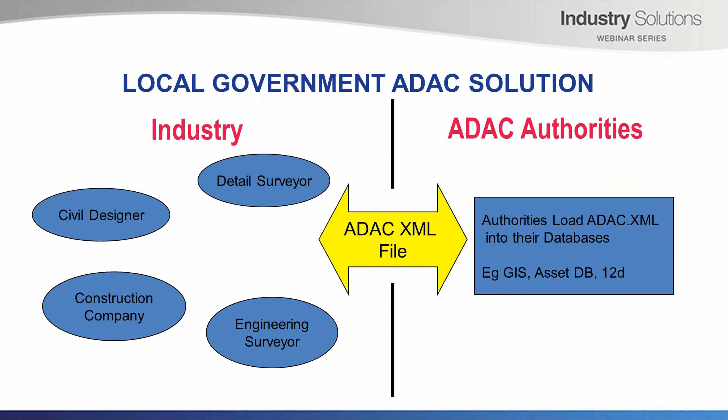So the idea with the ADAC and the ADAC XML is that the authorities can ask for the file from industry and it'll be the same from everybody. Then they can take that file, which they know all about, and can load it into their different databases, because there's a variety of things. It might be GIS, it might be an asset database, it could be into 12D Model. It's just not going to one place. But more than that, this is really what the diagram is.

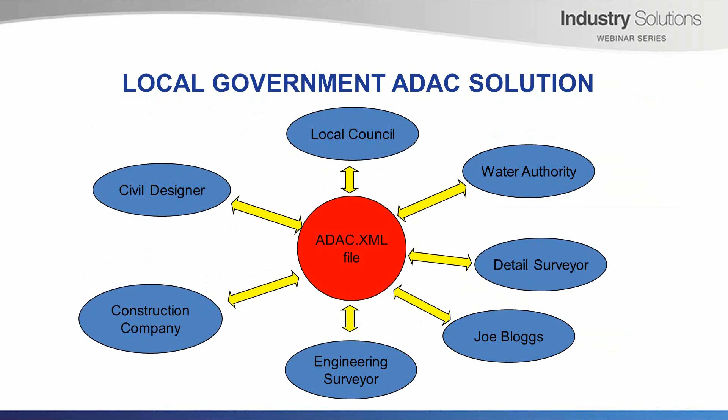You have your ADAC XML file in the middle. The people can read and write that. So all these different groups who can read and write ADAC XML can then transfer data between each other. So it's quite open to everybody. It could even be for Joe Bloggs, who's just some individual somewhere. He has no problem reading and writing that data once he looks at the format.

Initially, there were about 68 ADAC assets, and from the literature that shows things like water, transport, sewerage, stormwater, and so on. And there's also work underway for things like bridges, buildings, coastal infrastructure, and pump stations. That ADAC consortium then just meets regularly to start adding more things to it.

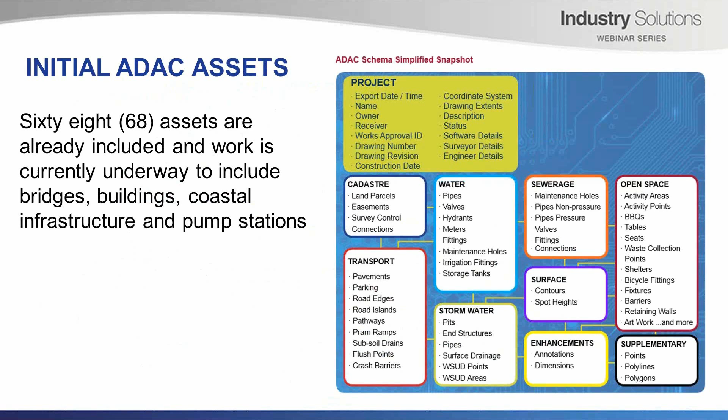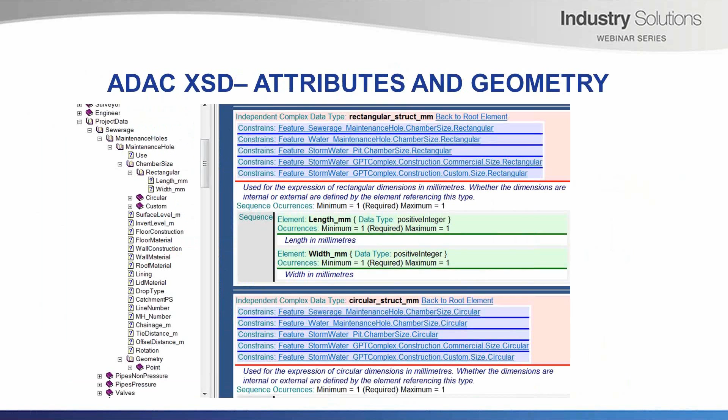Now, what they actually do is they publish the ADAC XML schema, and that's in the form of a CHM help file, and this defines everything in the ADAC XML file. So basically, I've expanded there on the left-hand side. It's showing you've got header information, which you call the project header: the name, the owner, the receiver, things like that, coordinate system, the surveyor and the engineer. Then you have project data, and that's where you have individual assets, say for sewerage, transport, water supply, and so on. When we actually get to the assets, they do have attributes and geometry.

So, for example, here are the various attributes that go with a maintenance hole. So you've got chamber size. It could be rectangular, circular, or custom. If it's rectangular, it has a length_mm and a width_mm. And they're actually positive integers, and you have to have one of them, just one. So that's how far the definition goes.

It goes down not only to give this hierarchy of where everything should be sitting, but will say that this value has to be something like a positive integer, or it has to be a bit of text. The good thing about that is that you can use that XSD to check a file against, so you can validate it before it goes anywhere to make sure it satisfies all these conditions.

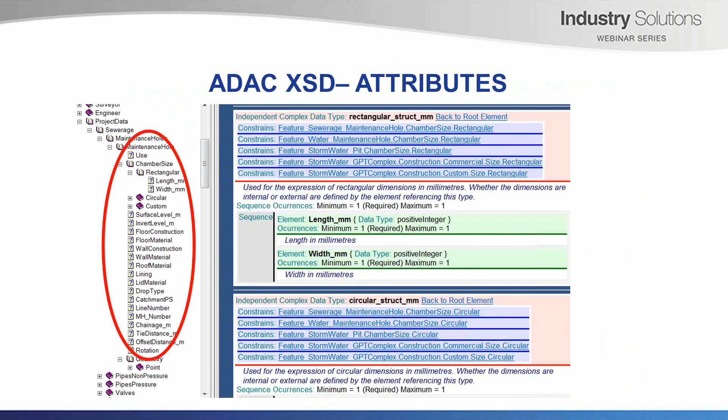So they're the attributes, but you also have geometry. And the ADAC geometry can either be a point, a polyline, or a polygon. They may or may not have arcs in them. The asset will say if you're allowed to have arcs in your polyline or polygon, but it's one of those, and the asset says which one it is.

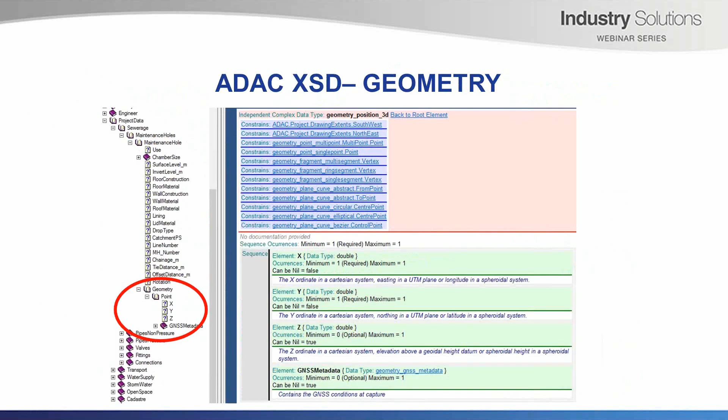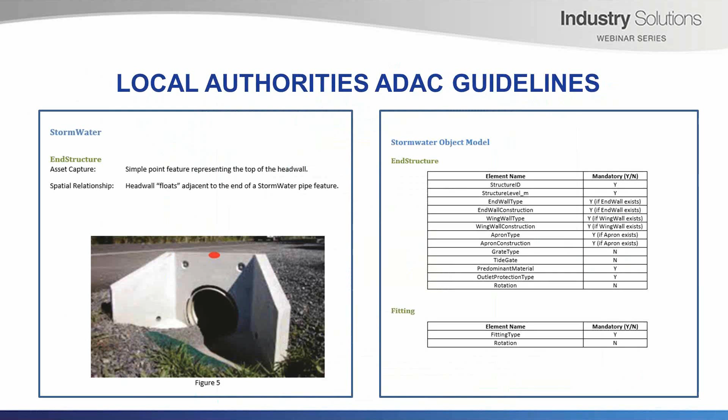Now, the local authorities also have these guidelines, and again, this is one for Bundaberg, Gladstone, and Rockhampton, who took the general ones and then just localized them. And for example, for stormwater, the end structure, it was one point in the ADAC, and it shows you here exactly what they want, the top of it, the head wall, and on the right-hand side is more specific for those councils. These are the attributes, and they've got there whether they want them or not, whether they're mandatory. So StructureLevel_m is mandatory, but something else like tide gate, they don't wish it. So that's where it may be restricted for each council.

Now, 12d and ADAC. As you see, ADAC is coming from a government group of people, and so the other thing for us at 12d is how do we implement and get involved with ADAC? Well, our approach is that we want to have ADAC data fidelity. That is, if we read in data from ADAC, we can hold all the information there, so there's no data loss. And luckily in 12d Model, we have all those types of geometry, point, polyline, and polygon, and we also have hierarchical attributes, so we can hold that full attribute schema with no problems.

The other thing we've done is that the ADAC editors and validators within 12d Model are driven by that ADAC XSD. That minimizes any implementation errors, and if there's a new schema, we can update to it very quickly. All the data in 12d Model is 3D as required by ADAC, so there's no problems there. And in particular, we will be able to round trip the data. Because we can hold it all, we could read in a file and write it out again, and there'd be no loss of information.

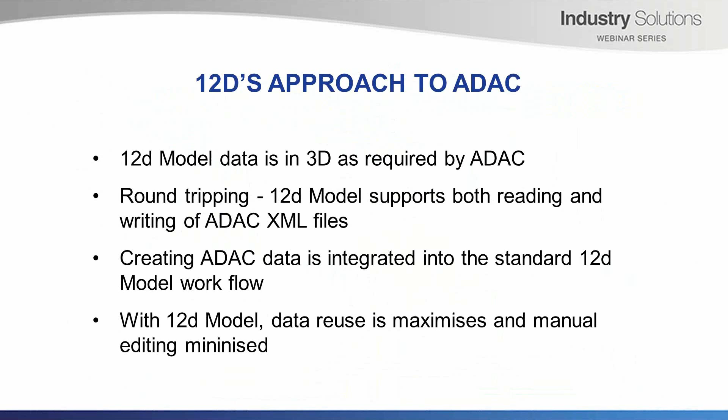We also want to integrate the ADAC data into the standard 12D model workflow, so our users don't have to learn a totally new set of things to do. And inside 12D model, we want to maximize the reuse of data. We don't want you to have to type in things twice. So by doing that, we minimize manual editing.

So what I'm going to do now is actually demonstrate for you using ADAC inside 12D model. What I'll do first is read in a file, to see how anyone can read one in with 12D model, and then we'll look at how a designer and a surveyor produce an ADAC XML file and explain the differences between those two types of people.

Right, so I'll just open up a blank 12D model, and I'll read in an ADAC XML. With ADAC inside 12D model, it's under our menu. There's actually an option for ADAC, which is the menu I've got here, or by just using the F12 button, it will bring up the menu. The other possibility is toolbars, and down the side here I've got a number of those ADAC options on the toolbars. So there's a variety of ways of getting access to it.

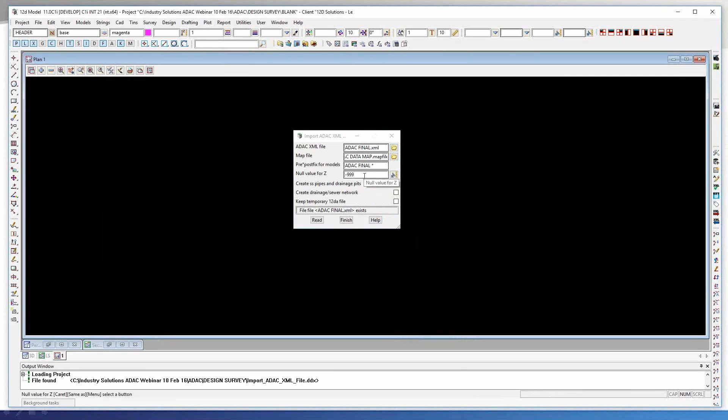So in this case I'm going to read in an ADAC XML file, and I've just picked it from the ones that are available here. I'm going to use a map file, and those people who've used 12D model, and most of you have, know that when we read in the data, we're able to map it into different models, different colors, and so on. We're also going to set any -999s to null Z values in 12D. We're going to create pipes and drainage pits from that data.

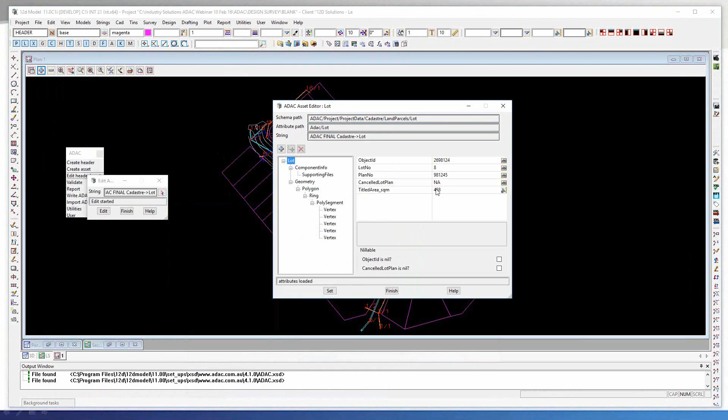So we've just read that in, and we'll just add that information. We split it into these different models as we read it in. We'll just add those on. So that's some ADAC data coming in. And if we now look at that with the ADAC editor, I'll just get up the menu and edit one of these assets. And when we accept it, you can see this is the ADAC editor, and these are the various things you could have in it, its geometry and the information for those assets. So it's all come in from that particular file.

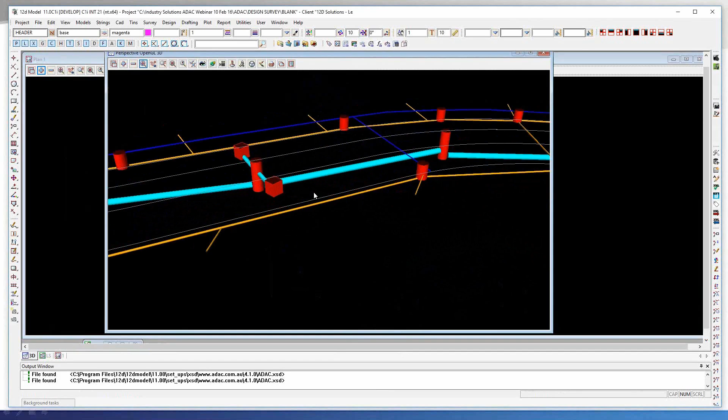I will go and show how we created this file, but this file could have come from anybody. So the information's all there, and we can use it for a variety of things. For example, we could use it to label. We could look at it in 3D. So I'll just add the same data onto a 3D view. If there was a null Z value, then it won't show up on the 3D view, of course. You can see you've got your round pits, rectangular pits, pipes, and so on. So it is all proper 3D data. So that's an ADAC file.

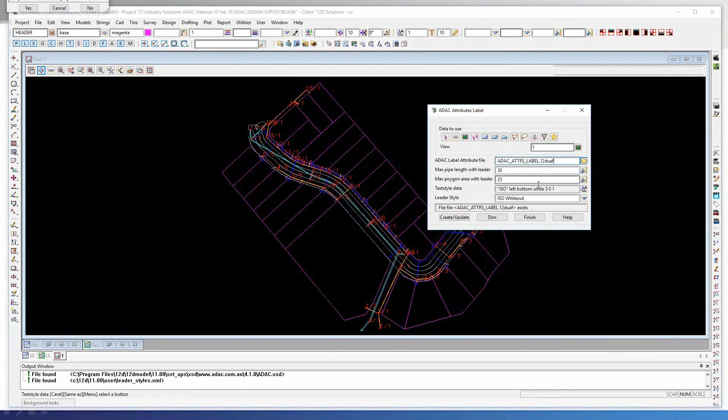Another thing that you could potentially do would be to label it. I'm just going to run a macro here first to get the data ready. This is just tagging it so we can use it for updating. And so if we want to label this data, we'll just label all the data in the view. This is an option where we use a file to say what do we want to do? Do we want leaders and so on? How do we actually want to label it? And I'll just run this, and it's created a whole lot of label models which weren't there before.

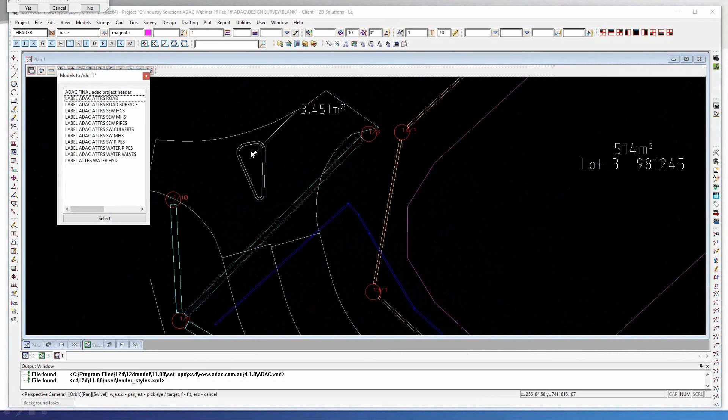So what I might do is turn on, say, lots. So we saw that lot information, and here we've been able to label it. Similarly, I might turn on road islands, and in this case, we've actually labeled it with a leader because it wouldn't fit inside.

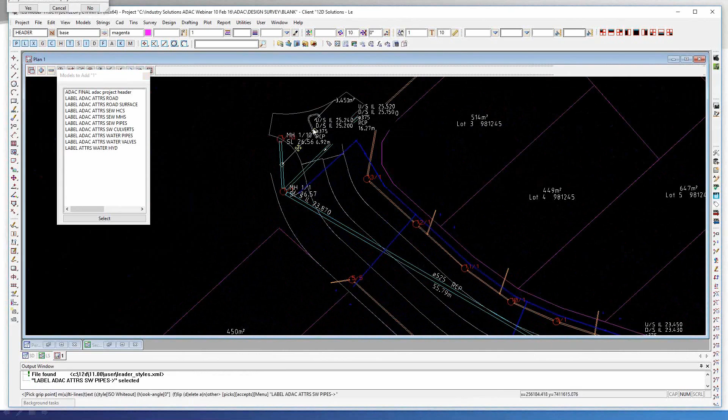So the data is all there, and you can use it to do all sorts of things. So you could turn on your stormwater manholes and pipes and so on. These are 12D model leaders, so they are intelligent leaders. So if you don't exactly like where they are, you can actually pick on them and move them around out of the way and so on. So the information's all there to use.

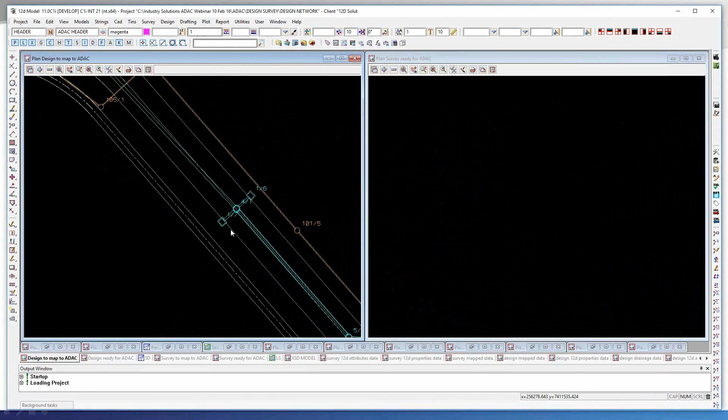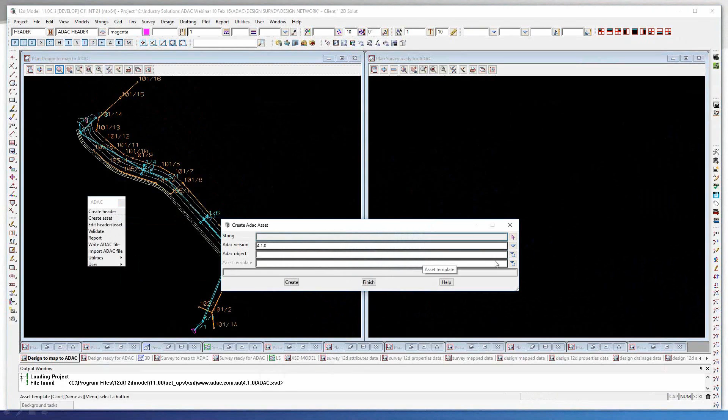So inside 12D model, they are actual pits and pipes and things. And being 12D data, in this case, this whole string here is a whole drainage network. So we know a lot of information about it. The designer has all that information, so we can use that to go straight across to the ADAC file. We could pick up particular things and create an ADAC asset, and that just allows us to pick one for a version. Depending on the point or polyline, we can actually manually do it.

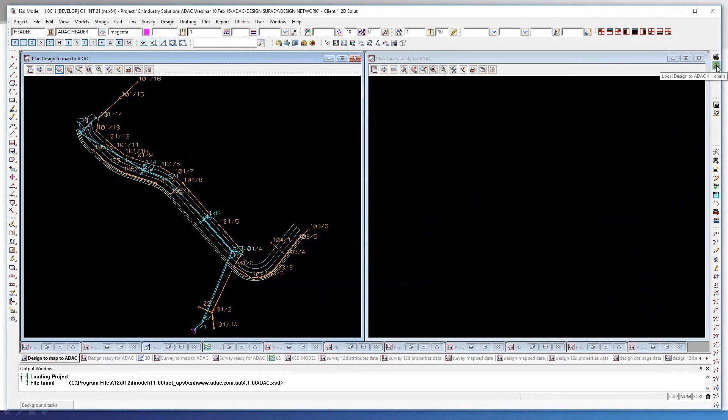But what we do inside 12D model, we run what we call a chain and use a mapping file. And if you know what these things are going to be, you can say map all the manholes to ADAC manholes, pipes to pipes, and so on. So you don't have to do things manually. So I'm going to actually run this chain just to show you how it works, and we'll look at it a little bit more carefully later on. So we'll do the local design to ADAC chain.

So it's processing the data. It's completing the chain. And you can see there, I've got the wrong view up there to look at the data in. It's actually now posted and put it up there. Now, if we now look at this data here, say with our ADAC editor, like we did before, we're going to look at any ADAC data.

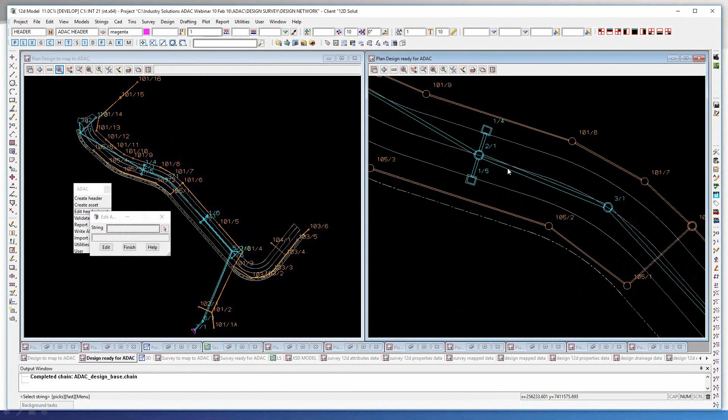So if we actually pick on the pipe here, it comes up as a pressure pipe, and has all the information we picked up from there, the size of it, what type of pipe it is, and so on. So that all came straight from our ADAC definition, and similarly for any of the other data there as well. So in that case, this was a road area, and so we went through the pavement with information about the pavement. So that's all the designer needs to do, set up the mapping file inside 12D model, and then you can process as such.

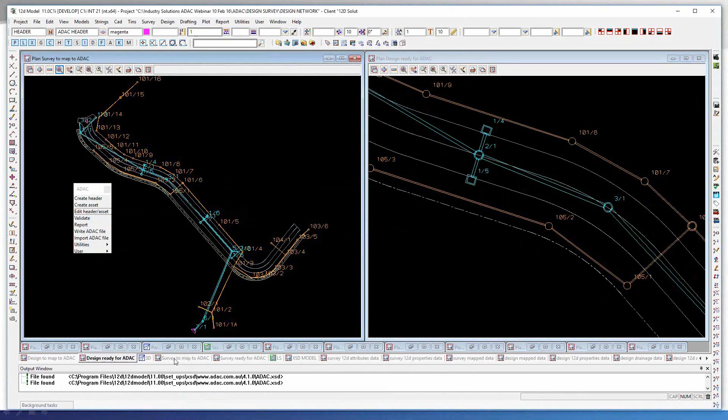Now for a surveyor, I'll just get some survey data there, and on the right-hand screen, I'm going to this time have my plan ready to go to ADAC for a surveyor. The difference between a surveyor and a designer is that he wouldn't have a lot of that drainage information. So when he picks it up in the field, it's there as just separate points and separate lines and things. So this information here is just being picked up in the field, and it's just a point. And this will just be a polyline, potentially with a size to it.

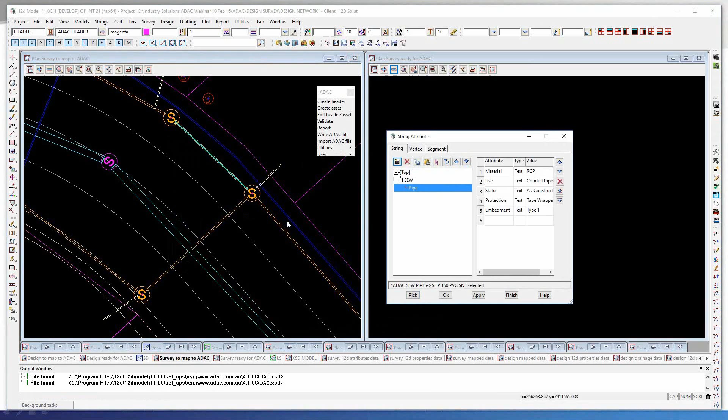What you do have, though, is that when the surveyor picked it up in the field, he could pick it up with attributes. In this case, this one came in from the field. It had information that it was a pipe, had certain material, status and things like that. And what we're able to do is take those attributes from the surveyor and map them into ADAC assets. And this can be all user defined. So all these things that you're able to pick up in the field, you can have go straight across to ADAC. It's just unfortunately for the surveyor, he has to pick them all up where the designer has them all in the design.

So to process data, it's exactly the same sort of thing as we did before, except we'll be using a survey chain to produce it because it's got different type of data in it. So again, we'll run the survey chain, and it's actually produced that data. Now, if we look at one of those things again, we'll actually see that it's come across as ADAC data.

Just like before, it's labeled it, but also this other information that we're looking at, say a sewer pipe or a sewer manhole, if we looked at that, it's going, in this case, as a non-pressure pipe and various attributes for it. So no one had to enter those, they were just picked up from the attributes. You could add extra information in, and there's various ways we can do that as well.

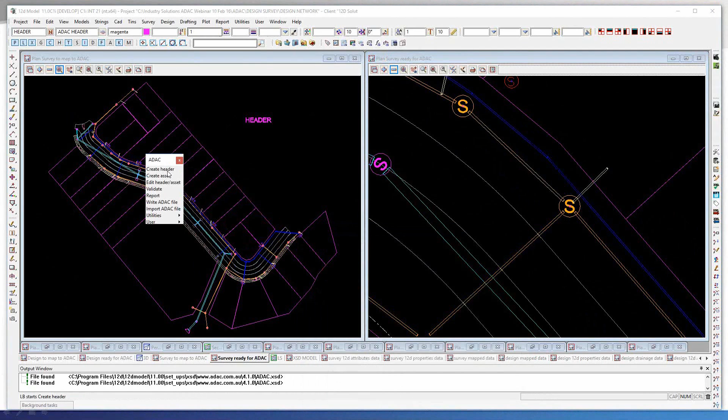So now that we have this data, what can we actually do with it? Well, there's a few other items on here. We can actually validate it. Now, what does that mean? Well, that actually means we validate against the ADAC schema. So what we can do is we can run and we can produce a report, but I won't worry, we'll just hit validate, and it's coming up and saying, ooh, there's an error in there. So there's actually an error. The information says that sewer connection type Fred is not a correct value.

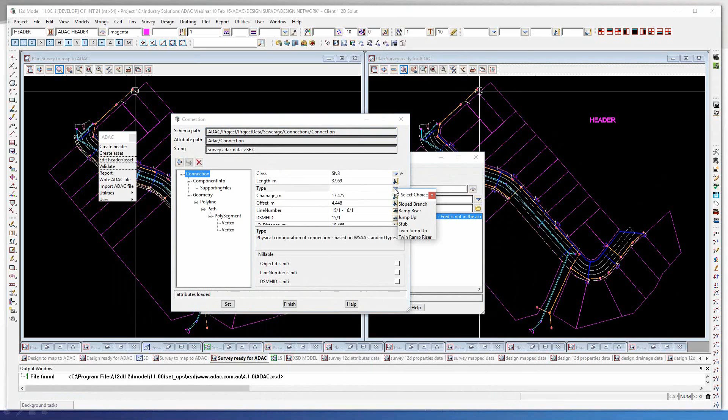Now, where is that? I can see right there where it is. And if I double click on it, it will take us back into that editor. And so basically what happened was that the value we had, which was Fred, was not valid for a type. So the only types were available, and this comes all from XSD with these types. So we have to have one of those. So that's an error. So we can validate it.

We can actually report on it. So what I'm going to do is I'll report on this data. And again, I'll report on the whole lot. So I'll pick all the data in the model. You could pick part of it. Now, one thing we need is what we call a header string. This one, you can see it stands out. If I actually edit that and see what that is, you need one of these for each project.

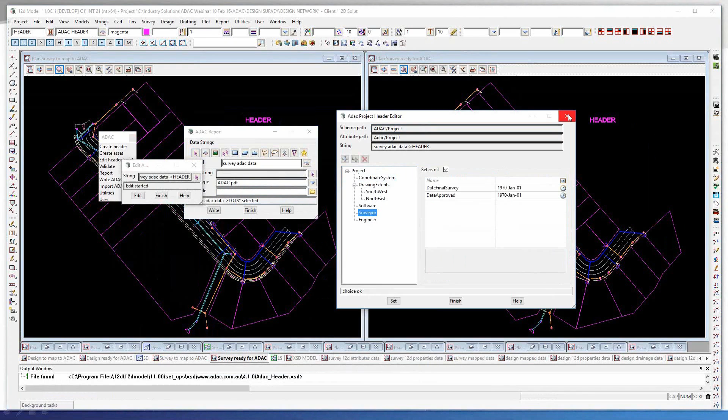And what it basically is, is all that header information that was metadata for the whole project. So things like your coordinate system, the surveyor, the engineer, and so on. So we need that to put into our report. And I have one set up there, but you'd set up one, or you may already have them set up with all people's names and that. I'll produce an HTML file. We'll call him Fred since that was the offending value there. So it's now producing the report for all that data that we saw on the screen.

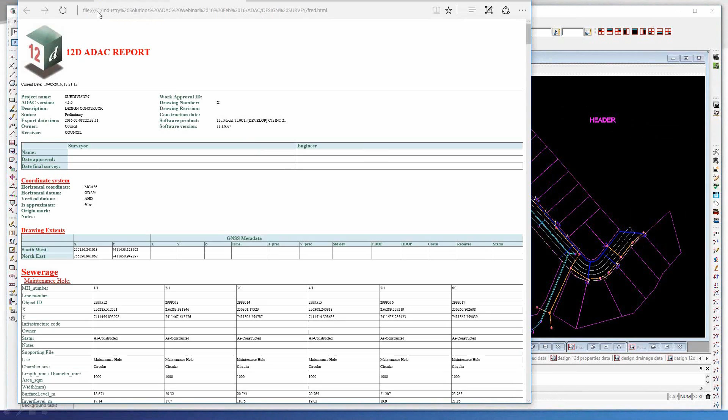So here's the header information we had, and then in this case it's giving us sewerage manholes, a number of columns of them, all the major information, and the XY coordinates. So you've got your manholes, your pipes, and so on. And you don't have to do everything, you can pick just some to report on.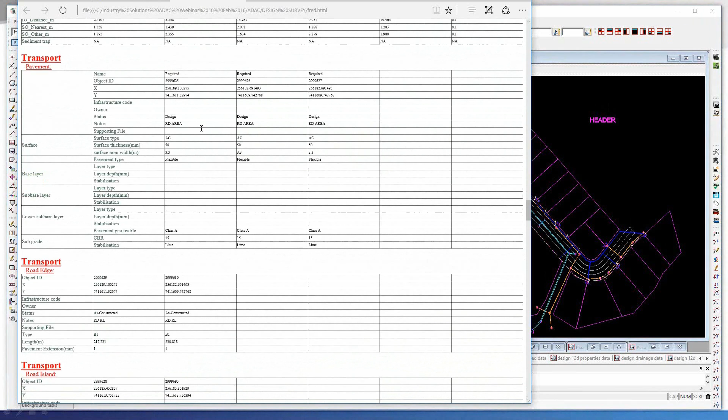So we can validate it, we can report it, and we can actually write it out. And to write the data out, it's basically write an ADAC file. And in this case, we'll just pick all this information. We need this header again. And basically, we just say, write it out.

Now, that ADAC file I wrote out was exactly the one I read in earlier on. So it did come from me in this case, but it could have come from anybody. So that's the slight differences between design and surveyors, but that's just the sort of information they have to go with. But reading a file in is the same for everybody.

So we've gone through things we need to demonstrate. So in summary, we had this industry nightmare of everyone wanting something different. You couldn't transfer information, and even within the same authority, they would ask for different things. And the solution from the local government was open data. So by doing that, by having common definitions, one XML data transfer format, and making them public to everybody, everything's

right. A very, very important thing there, as you saw before, is this one XML data transfer format. If you don't have a data transfer format, it's like having half a bridge. And what's the use of going to the middle of the river if you can't get to the other side? So if you've only got common definitions and metadata and attributes, it's useless. You need this transfer format as well.

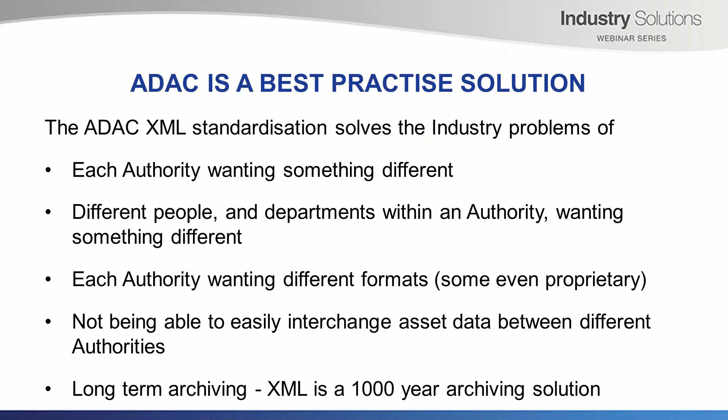12D Model and ADAC: well, we totally support the local government open standard because we believe it's great to be able to interchange data. The production and reading of the ADAC XML files has been totally integrated into our standard 12D Model workflow for both designers and surveyors, which I showed. And ADAC is actually free of charge for our users on maintenance. So that's the quick overview of the 12D Model ADAC solution.

Thank you, Lee. Now I believe we have time for just a couple of the questions that came through. Lee, Matt from Sydney has asked, what does an ADAC XML file actually look like? Ooh, you caught me out there. I missed part of my demonstration. If I actually go back in, sorry about that, I'll just get up the ADAC as though we're going to write one. So I'll get just one of these options up. And in here we can pick one of those there, and I'm just going to go and open it up. Right, sorry about that.

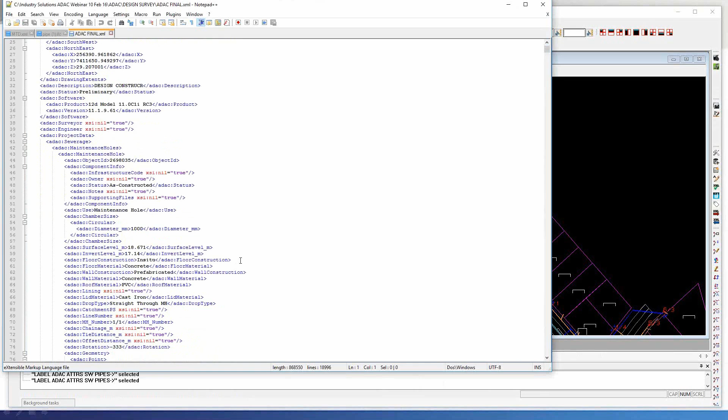That's actually what an ADAC XML file looks like. At first thought it's pretty horrendous, but once you see, look, here's the word ADAC maintenance hole, and then there'll be an ending record and all that information. So it's actually quite good. And being an XML file, with editors like this, Notepad++, you can close bits and bring them out again. So that's what it actually looks like. Good stuff. Thanks for that, Matt.

Also, a number of people, Lee, would just like to clarify the price of ADAC, please. Yes. It's actually for our users on maintenance. It's only in version 11 onwards, and then it's free of charge in those modules. For just reading and writing, it's just in the base. If you're going to be using drainage networks, you just need the drainage module, it's part of it. But surveyors don't need that. It's all just in the base part.